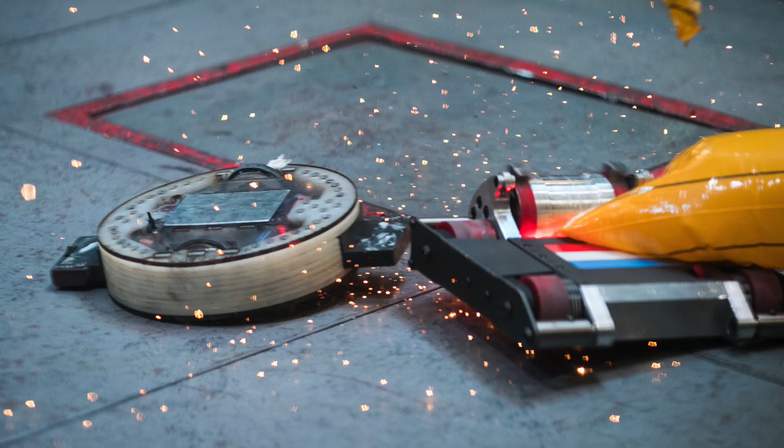Gareth, how would people in the robot scene know you? Mostly for my brushlessing, I'd like to think. But I mostly do beetles and feathers and some ants. I built Gear Down for What, which is the stupid brushless thing. Excellent, and that made you YouTube famous as well, I believe. I hope so, I believe so, yeah.

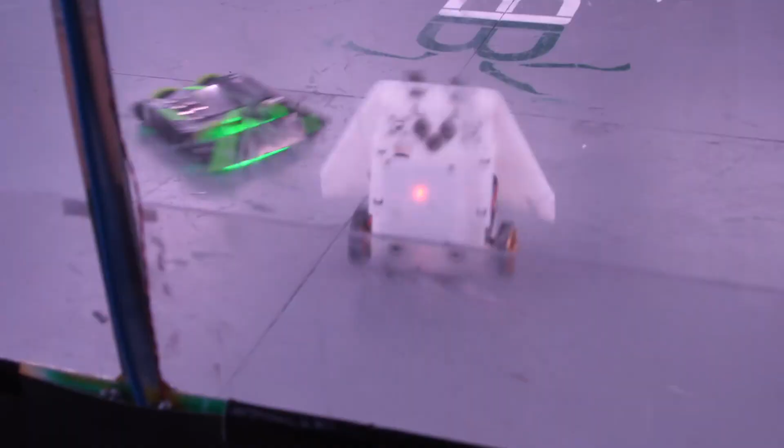And so famous with seagulls too. Yeah, seagulls, see, they know me. The birds are lining up outside my window right now, Joe. Wow, that's what's going on.

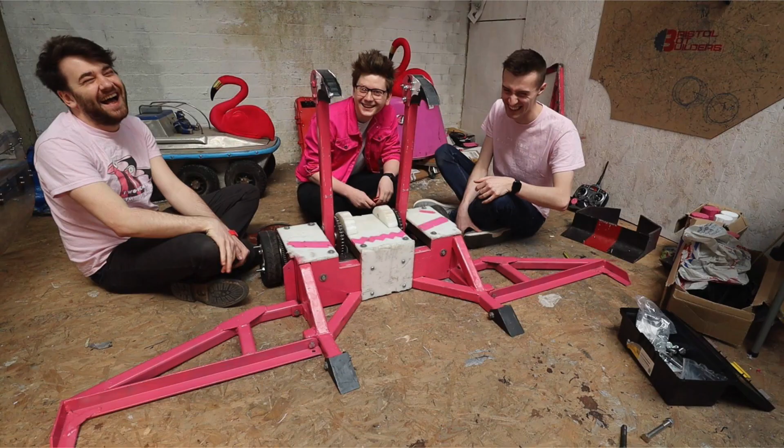Excellent, and together we are BBB, yes? Correct, Bristol Bot Builders. So normally we do events together, but we decided we wanted to do a featherweight together, and this is it. Can you see it on screen, guys? Yeah, what a glorious featherweight.

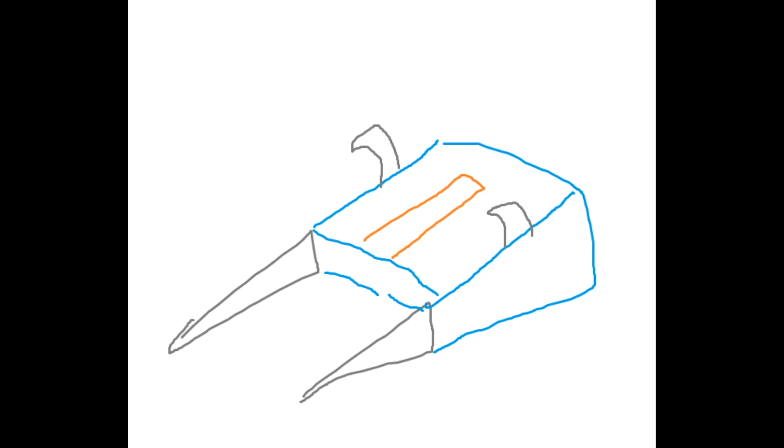So we had this idea back in August 2019, after the last Feather Champs. We did the Feather Champs and Robo Dojo, and we were like, Craig's not come to the feather thing, we've got to get Craig to the feather thing. How can we get Craig to the feather thing? And Gareth's magical brushless and Craig's great driving was a good combo.

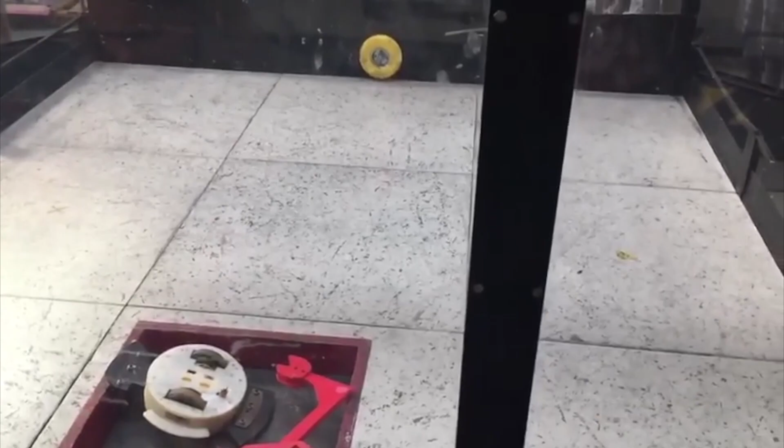So I'm just going to switch through some shit, some shit drawings, I think mostly mine actually. I think we said we wanted to do a feather cluster, and we wanted 3 of them. I think we wanted them to be red, green, and blue because Gareth really likes having gaming peripherals. Also it's near enough Powerpuff Girls, which I was - oh yeah, so it was Powerpuff Girls, it was RGB.

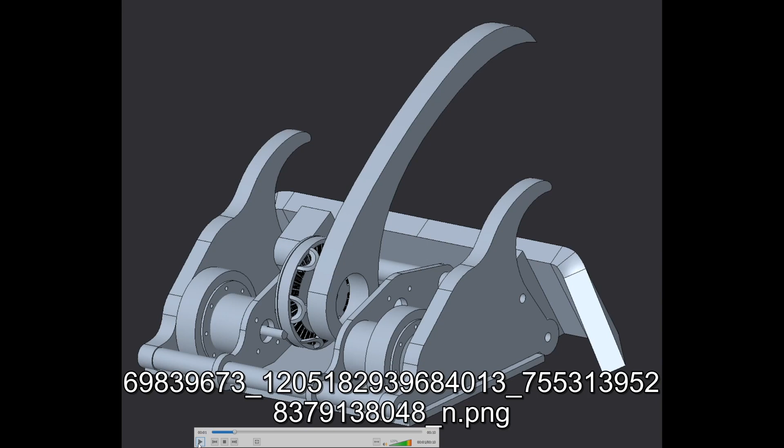Gareth was trying to put weapons on for me because I was begging for weapons, but there just really wasn't the weight. We tried waggle sticks, and Gareth tried this vert thing, but I think we settled on like a kind of wedge form, and it's using kind of Gareth's magic, which is massive brushless motors and direct drive, no gearing. All the brushless hub motors.

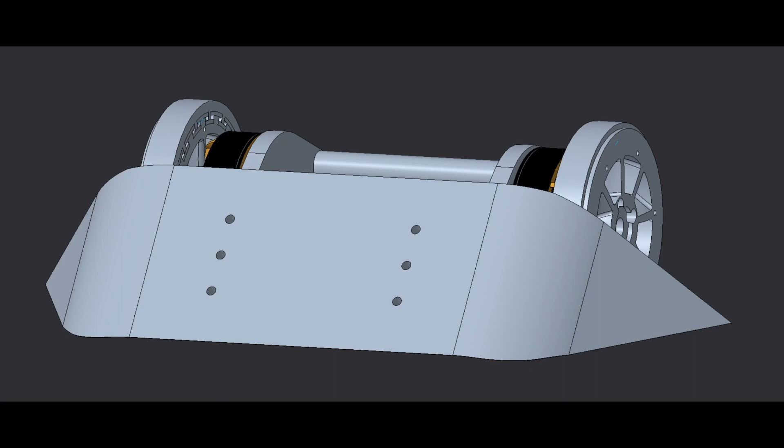And I think at this point we'd already looked at bending plastics. You can see that bent wedge that we've actually stuck with. After he'd made this version of it, he sent it over to me and Craig to ruin it in SketchUp. This is what we did with it, I think. I remember my one key improvement was moving the back axle, the big long bar at the back, up so that it could wheelie. So that's like this bit here on the left. There we go, nice wheelie thing.

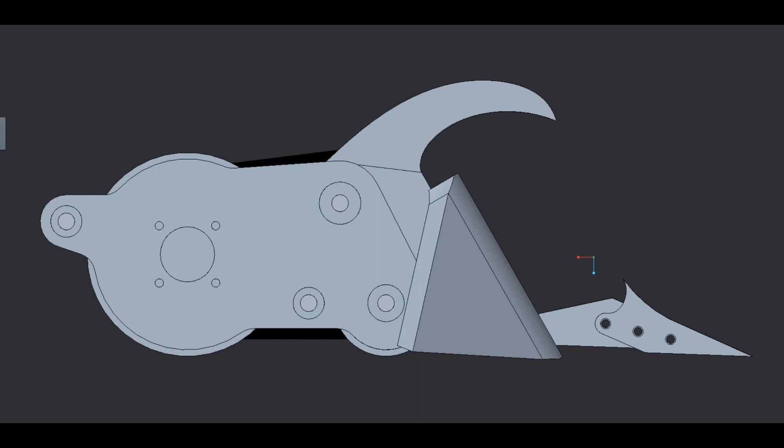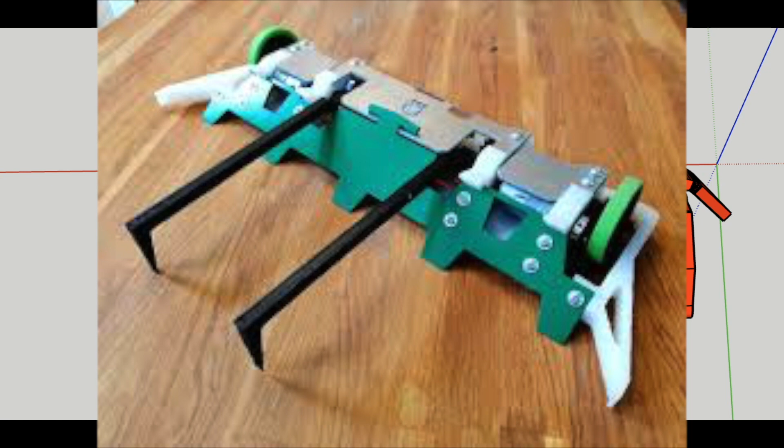Thank you. And we wanted to copy Alex Shakespeare, Shaky, as much as possible. So I just made it short and wider, so it was more like a wedge, his Antweight cluster. And he totally did give us his blessing, because we'd already ripped off his Beetleweight wide boy with flamingos, so we thought we'd just take it one further. Scale up his designs, I like to think. That's it, we take Shaky stuff and just make it bigger. Whether better is debatable, but bigger is for sure.

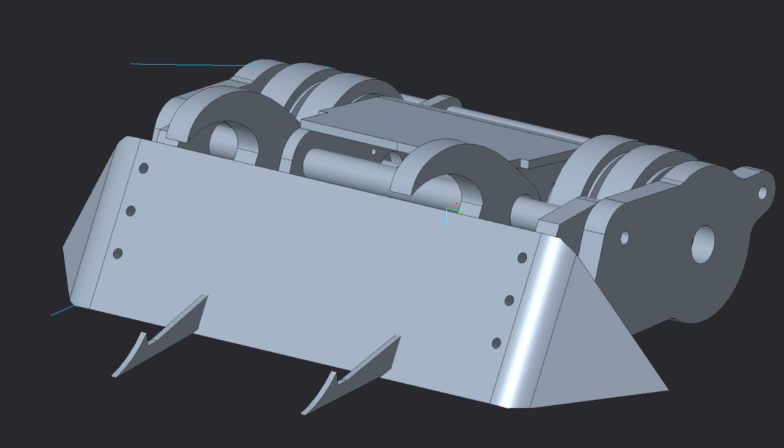So after we'd added the curved wedge, we added those hooks as well. We quite like the kind of stopping hooks. And we also wanted some forks, so we played around with some forks. Here is the RGB, the red, green and blue.

Beautiful. Priority number one, a big shared love of this group is HDPE, chopping board plastic. Absolutely, we like our bots to be plastic and just bounce around and take hits, ideally. Such a great material, make everything out of HDPE. There we go, make your life out of HDPE. Build a home out of HDPE.

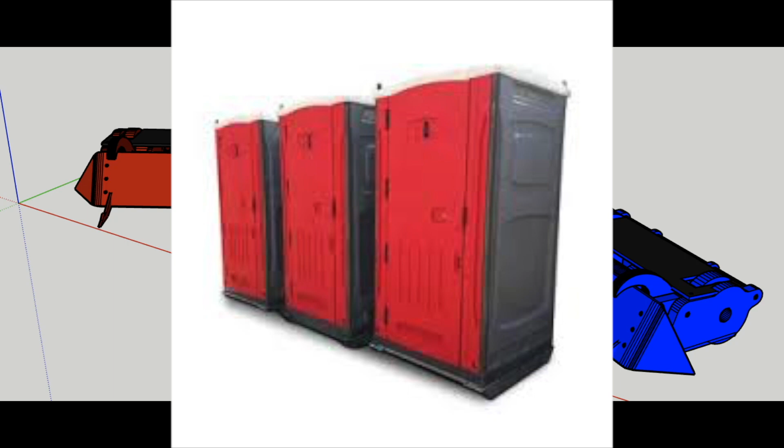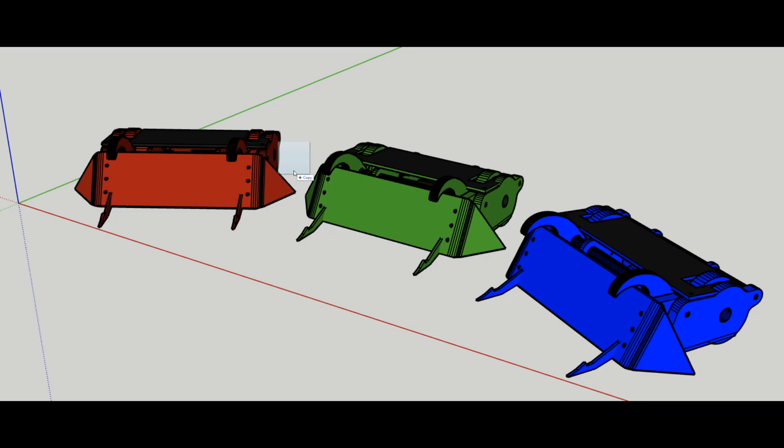I would. We literally just got the plastic in big sheets of this colour, and then we asked our friend Cosmin, can you please machine this? So I've compiled Cosmin's hours of machining for you guys now. I hope you're excited. So before we made the RGB bot, we decided we were going to make a prototype one out of white HDPE for Gareth to mess around with and do his magic with. So here is probably 10 hours of Cosmin's life in about a minute.

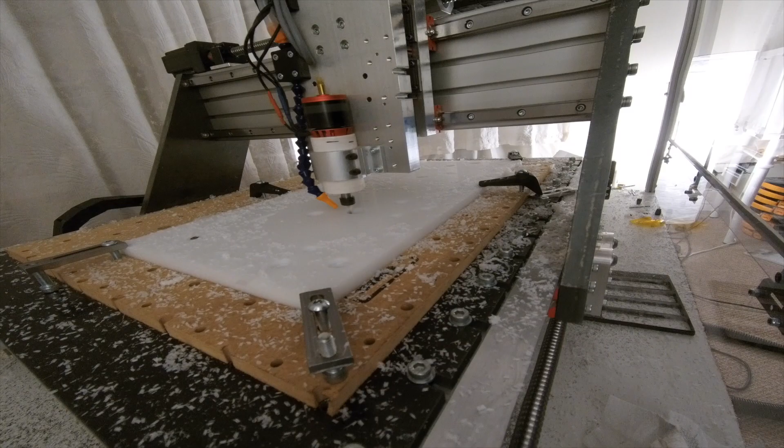That's beautiful. He's got this lovely CNC machine that I believe he's at least custom done a lot of, like the kind of brushless motor on the top. So obviously the brushless is something we're a fan of, or at least Gareth is.

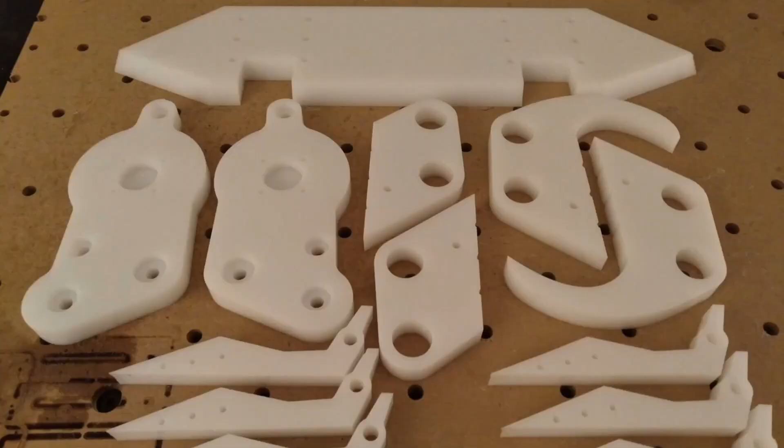You can see he's carving out all the parts of the robot, the bulkheads, the sides, the big wedge on the front's just coming out now. He's got his Hoover out now, giving it a good suck, and now he's just adding the little ridges to the wedge. That was the first physical part of this featherweight cluster.

So this was primarily for testing the fit, wasn't it? Testing fit, testing the electronics, and making sure it would all work before we spent lots of money on all the other ones. This was the test version of the parts, and it became known as the General. Later on he gained that name, and even Craig decorated him to look more general-like.

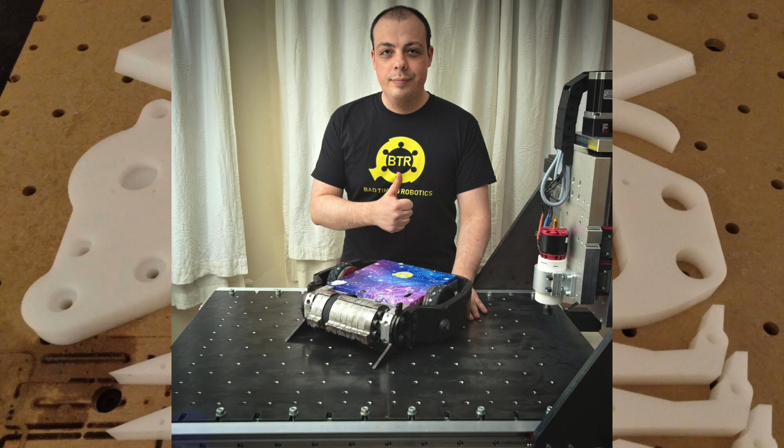I want to give a big shout out to Cosmin, or as we call him, Cozers, for his beautiful machining. Because this genuinely looked like it had been 3D printed or something - the machining marks just looked like little extrusions. It was really cool. Big up, Cozers. So smooth, so smooth.

I think this is around late December at this point. We ordered these motors from various sources in China. They came in completely different colour, size, weight and everything compared to advertised, which is excellent - various quality. Gareth opened them up and had a look. When I first saw them, I thought they were actually pretty decent motors. It was when you start looking closer, that's when you realise they're terrible.

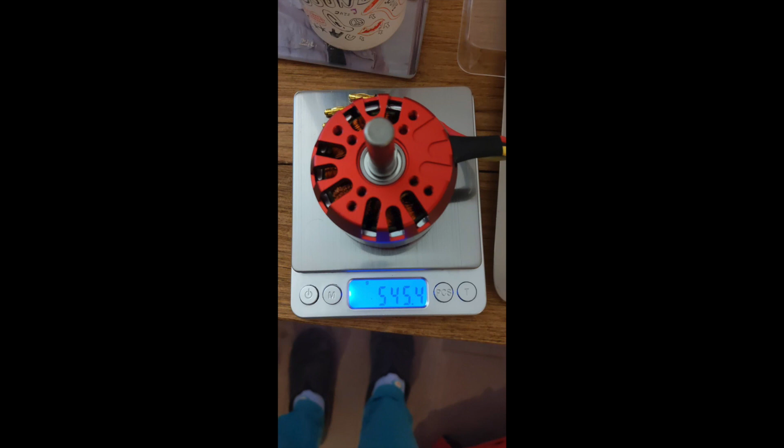They're really cheap power, to be fair, like 20 quid each, those ones. They'll put a lot of torque down, keeping the 1 horsepower per kilogram power to weight ratio going. Is that your rule for your robots? That is the rule. So here's another part of the magic that Gareth provides.

This is the magic that went horribly wrong - these ones where the speed controls are just overheated constantly, running an antweight weapon motor. So it can do that at least. It can do that, it's still overheated, but it can do it. Amazing, you can see them next to the ruler there.

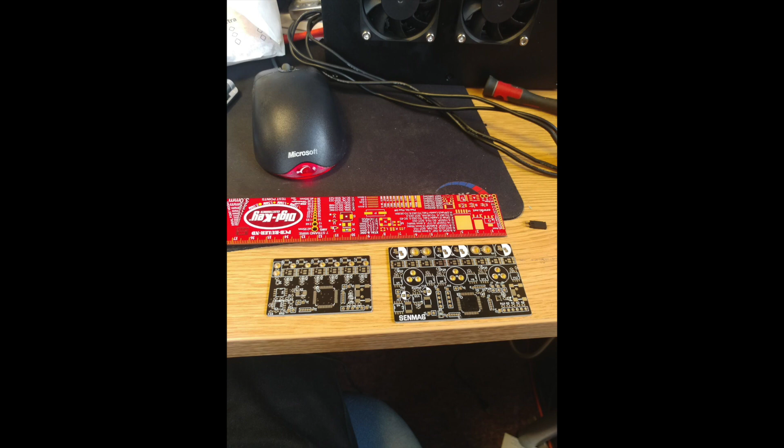They were ambitious. Oh yes, there's a ruler. Trust you to have a PCB ruler. Send you it for free. Yeah, they'd turn a motor, they just probably wouldn't survive well at sort of 40, 50 amps.

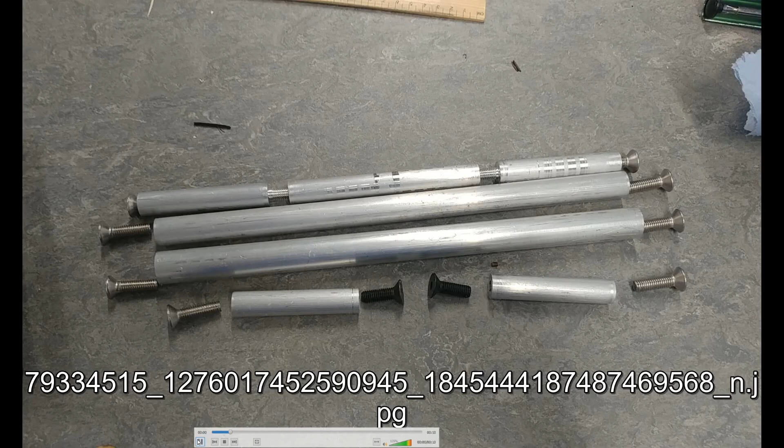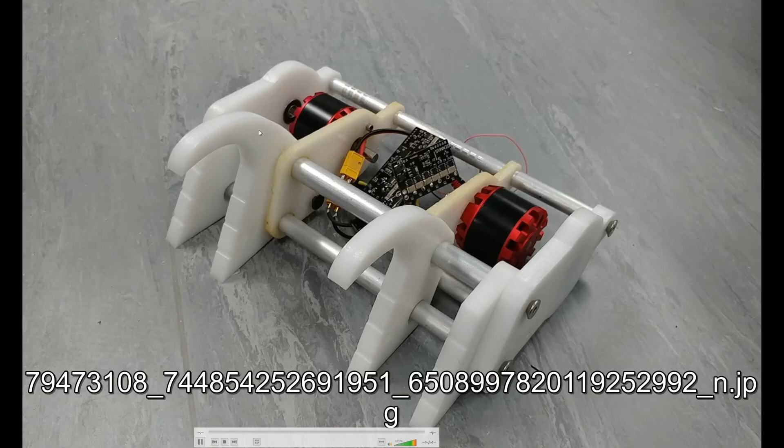The Gareth build style is this sort of HDPE or nylon, some sort of plastic along the sides, and then across it is always some aluminium bars. So Gareth had machined some for testing like a mad lad, and put together this sort of chassis here.

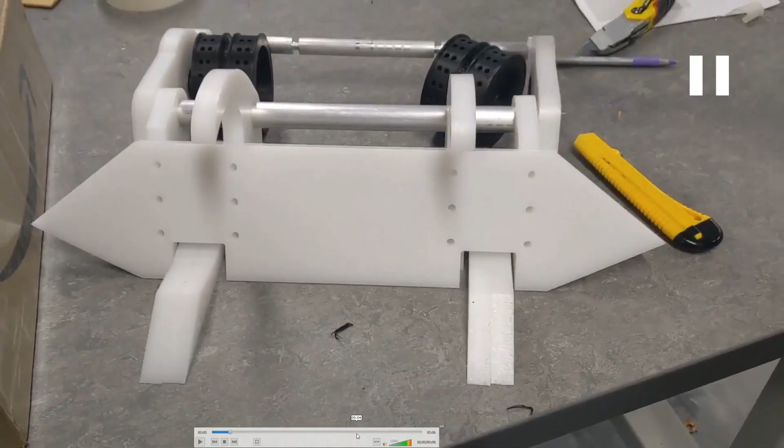After you've mostly assembled that, I think you managed to get that guy driving. So let's have a look at some little clips of this boy driving around. Jesus Christ. I feel like one of these would be a threat to a featherweight. I think this is the exciting thing, as long as they're not glass cannons, you know?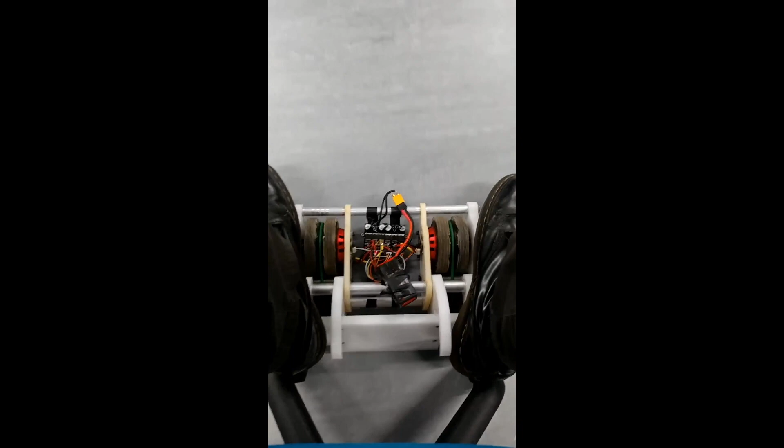Here's one pushing Gareth around, thanks to the vertical video, Gareth. I appreciate that. You're welcome. Sarcasm. So yeah, at this point Gareth had proven the concept, right?

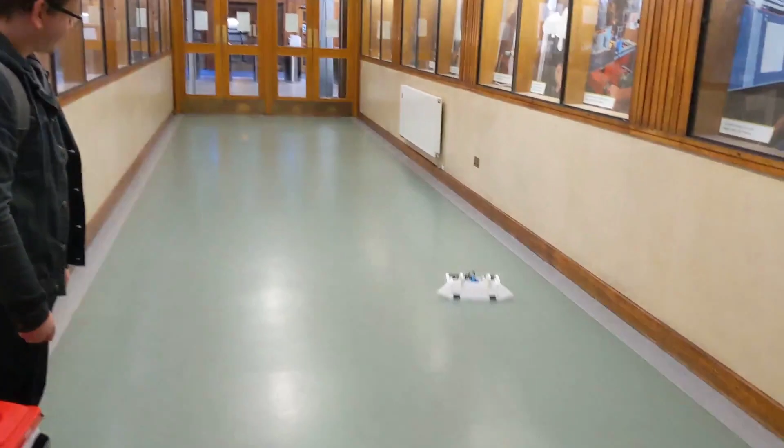It drives. Which is all we needed, right? Yeah. Cosmin sent us this lovely package.

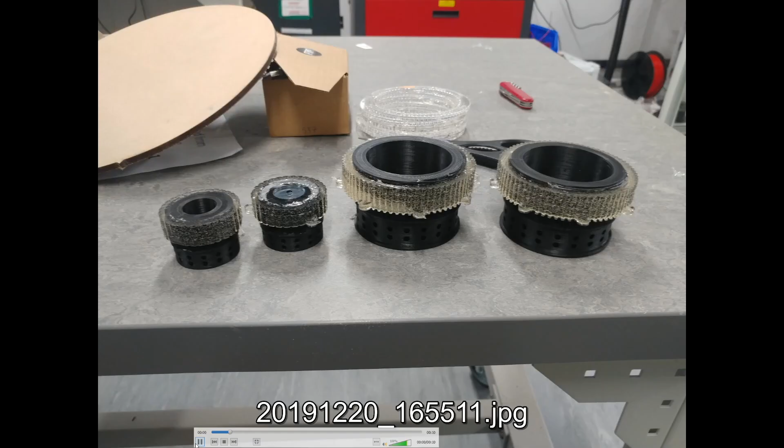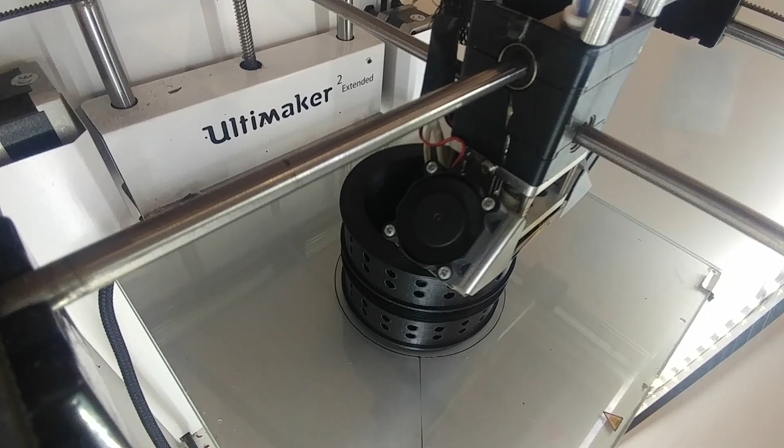So now we're on to Gareth's wheels. This is like almost scaling up ant wheels. There's not many people that do 3D printed wheels at featherweight. This is another thing into the glass cannon side of it all. I mean, it works at Beetleweight.

You 3D printed hubs that click over the top of the motors, laser cut these acrylic molds. I love acrylic. You're doing this one-handed. Yeah, this is great. That's the problem with being a YouTuber, Gareth. You know the struggle now, man.

And you're moulding the tyres onto those. Yeah, so you 3D printed hubs, it's a polyurethane mix, so you just mix two parts together, pour it into the mould, and it sets directly around the wheel hub.

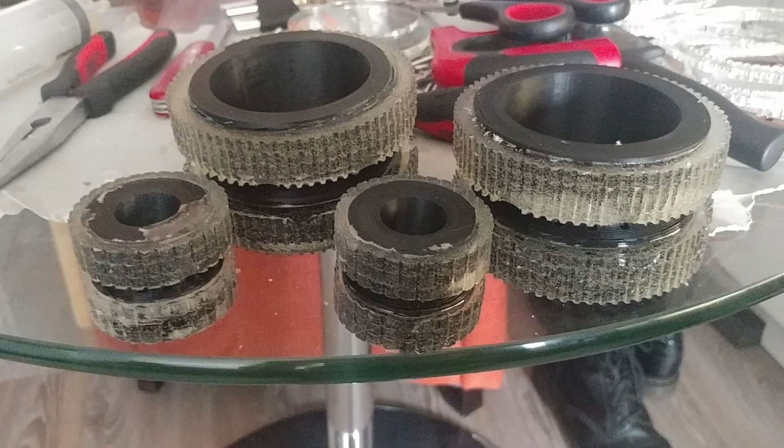This is where Gareth made the alley bars. I made a couple, but Gareth made 90% of them for the robot. They just sort of measured to different sizes. And yeah, before everyone thinks we have loads of fancy tools, we don't.

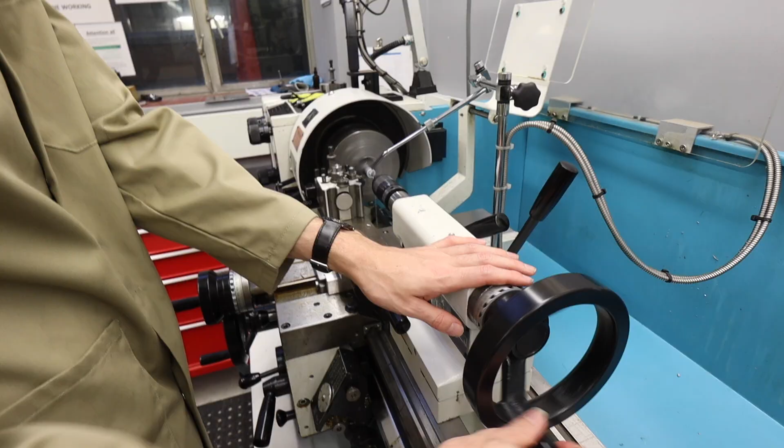We just leech off the university, alright? Yeah, big shout out to Mike at the workshop, Mike at Bristol University Student Workshop. He just makes stuff for us that has nothing to do with university. So, shh, I didn't say that. Give that man a raise.

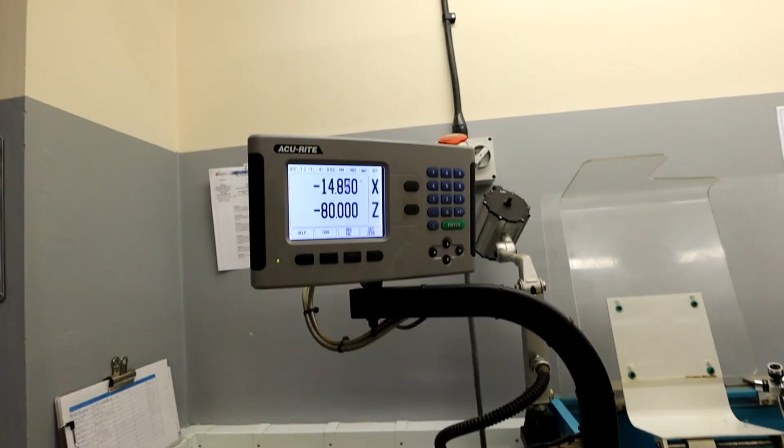So at this point, we were discussing the theming, because I told Cosmin we were doing RGB, and he was like, oh, that's quite good, but it's not that silly for you guys. You normally do really stupid robots. And so there's 3 of them, so we talked around the 3 Musketeers theme.

So this is some concept art, I guess. And then this is where Craig's absolute creme de la creme comes in. This is Craig's... Craig de la creme. Craig de la Craig.

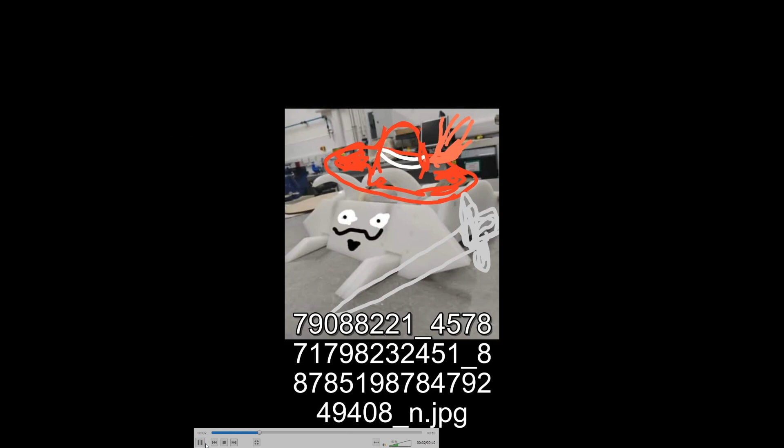So yeah, we obviously tested this out with the concept of hats. We were like, okay, this needs to be a Musketeer style robot. So here's some concept art again, high quality stuff. And then here was a hat I've ordered off eBay with a banana for scale. So here's testing on the robot, some lovely Photoshop from Craig there.

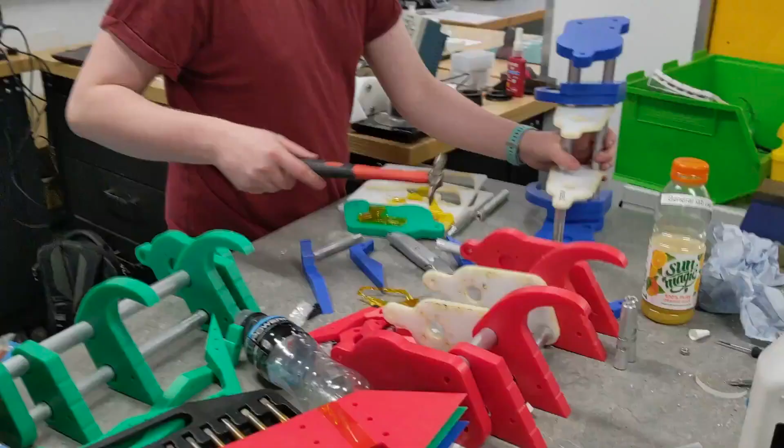So we knew at this point this had potential. It looks ridiculous enough to be something that we have made. Now it felt like not just an amazing Gareth robot, but a Gareth robot that's been tainted with our shite. So now we actually start building some robots because we're happy with the prototype.

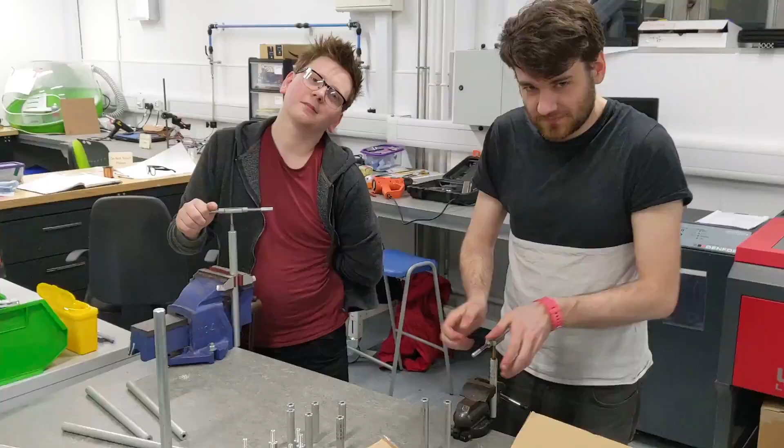So let's see, the session begins with tapping. So the boys are tapping some holes.

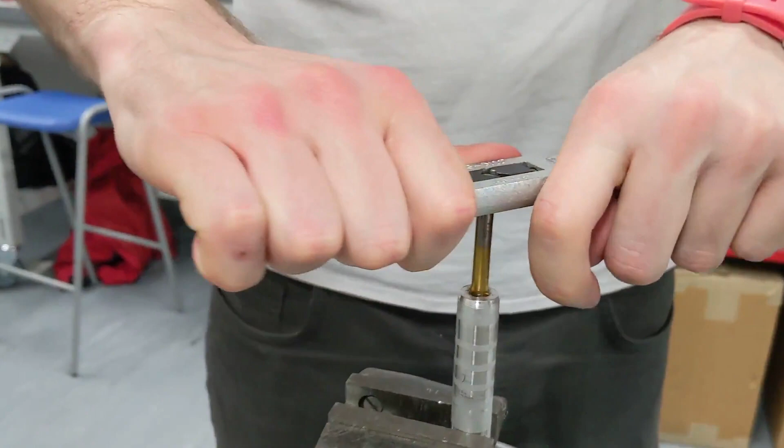Should be banned from robot combat. I'm saying it, these would be better if they were HDPE. Let's get a close up. Have you ever considered making your motors out of HDPE? Oh, he's pretty much home there, almost hitting in. I'm almost in, my first tap of the evening.

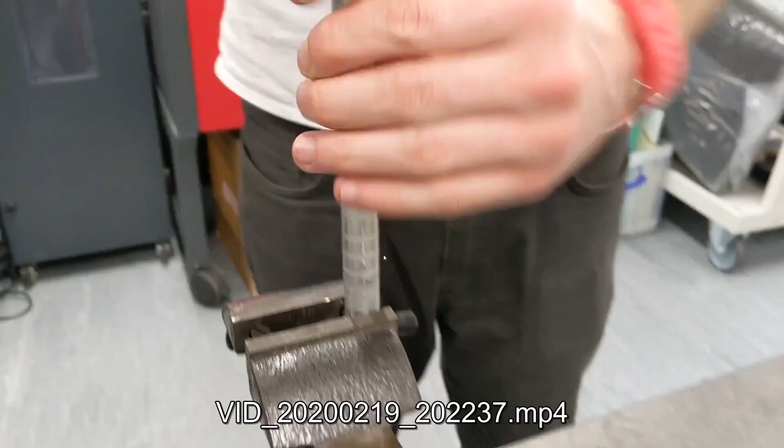It's only taken me 20 minutes. And Craig's already got through a whole two ends of tube and 3 ends now. Look at all that. How are you saying? We spent bloody ages just tapping, didn't we? It was a long period of tapping. It was more than an evening, wasn't it?

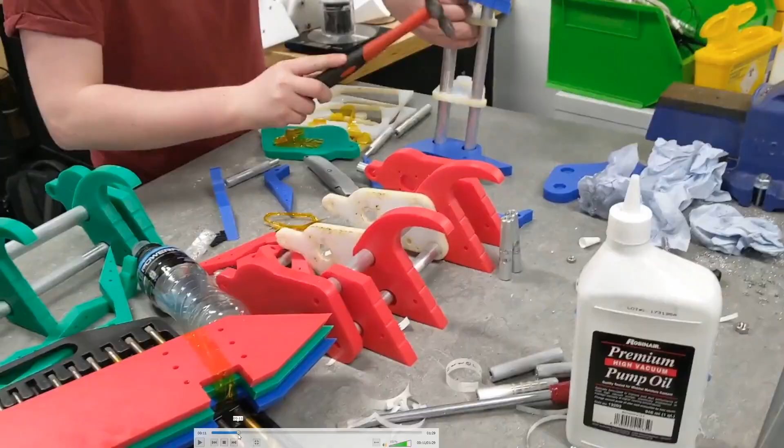So you guys carried on the next day. The bars sort of go between the different bits of plastic and kind of screw together to hold it in place, and are probably going to shred instantly in combat, which is really good.

Sorry, I think as time has gone on, my faith has lowered. But also, we had fun with the label maker. That's for sure. No, nobody had fun with the label maker. Absolutely nobody.

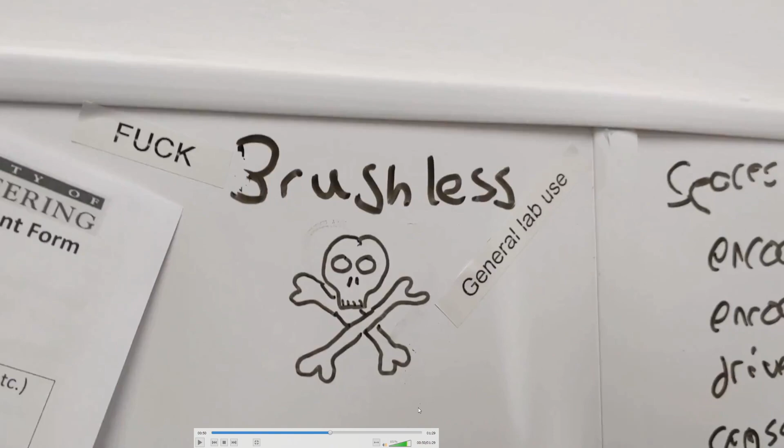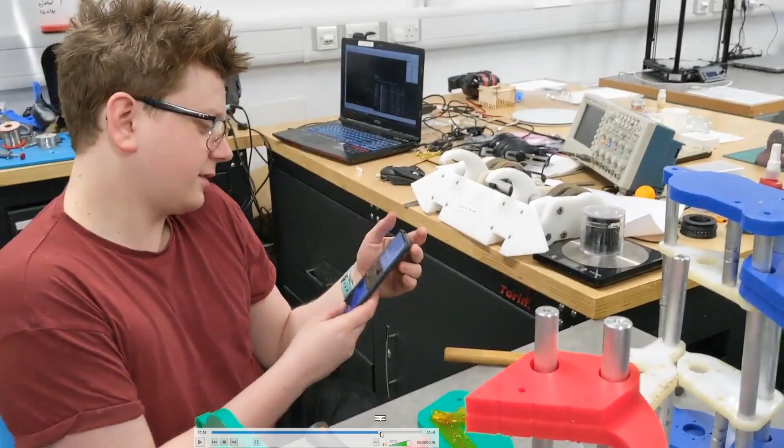And that's how the General came to be. There was a general lab usage label, and the 'lab' bit came off. You can see it there. So at that point it just says 'general' - his full name. And that's the General's origin story, which is magical, isn't it?

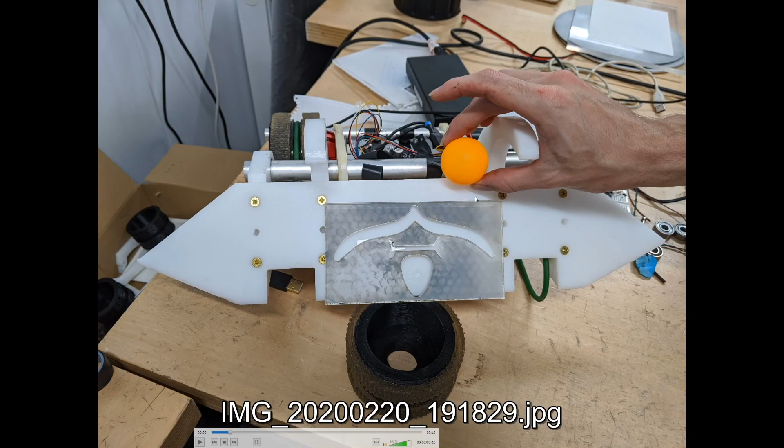So this is where you're testing out the moustache from Craig's lovely drawing. Having a look at this is Gareth modelling a ping pong ball as an eyeball test. So then we were doing the pods that kept the battery and the speed controllers in.

We use these thingies, shout out to Fingertech. This is Craig working his magic - this is Craig's absolute area of expertise, is heat bending 5mm HDPE. 5mm HDPE is my favourite material. You can do so many wondrous things with it. Unfortunately, this robot is not one of them.

So yeah, we had a go. They didn't really line up, but here's Craig having heat bent one of the pods. You can see how they kind of curve around, and yeah, they look kind of cool at this point, but I messed up all the holes - none of them lined up. The heat bending, as you can see, is already starting to shift out.

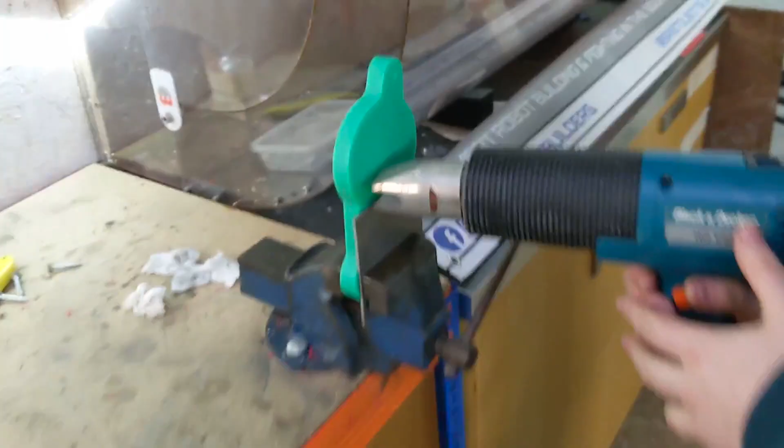Craig's also at this point testing out bending 15mm HDPE. I'd never bent anything this thick before. So that was like an offcut, wasn't it? That was one that was messed up or something. Yeah, Cosmin had put a slight crack in it and it would not accept it as good.

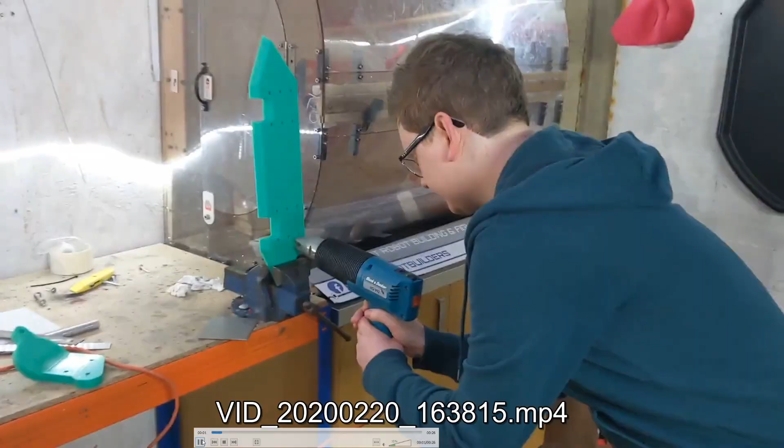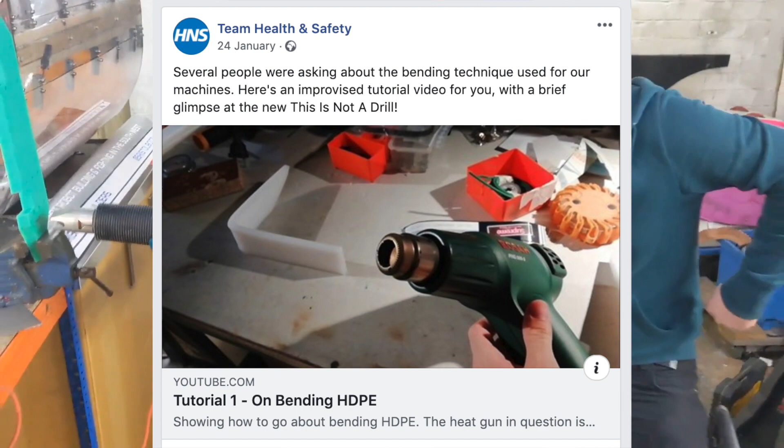So then Craig actually bent the actual wedges themselves at this point, which we're curving around the sides to protect the wheels, weren't we really? I guess. Definitely shout out to Greg Catalina for his tips on bending HDPE - check out that link in the description.

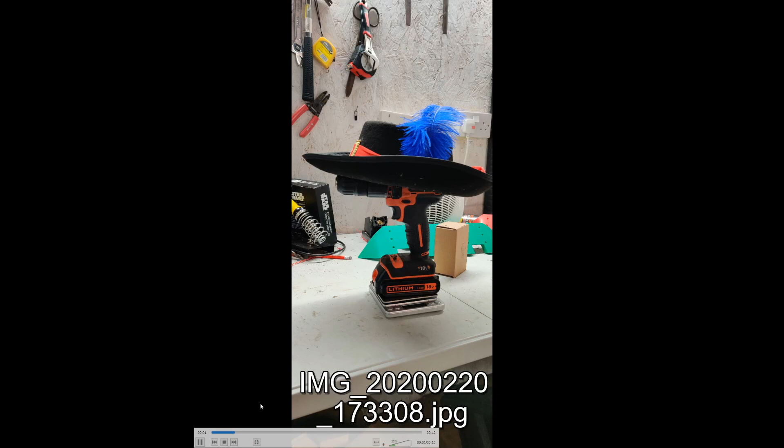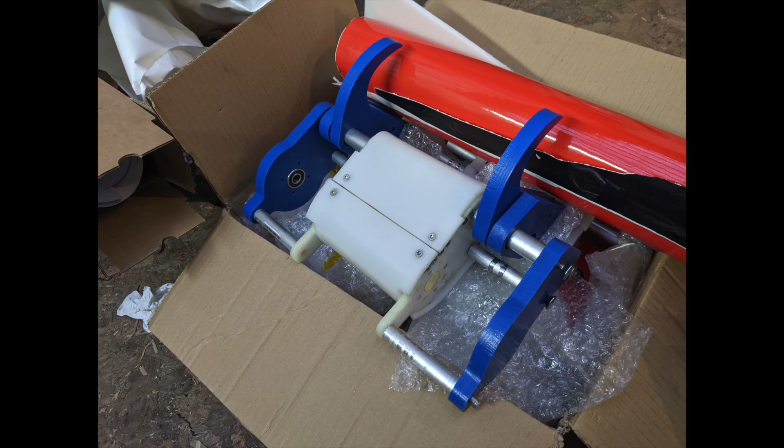That was our main building session those 2 days, I guess. So not much building - that's thanks to the Gareth style of robot, which is get the machines to do 95% of the work. Gareth has now soldered and wired up the electronics for all 3 robots.

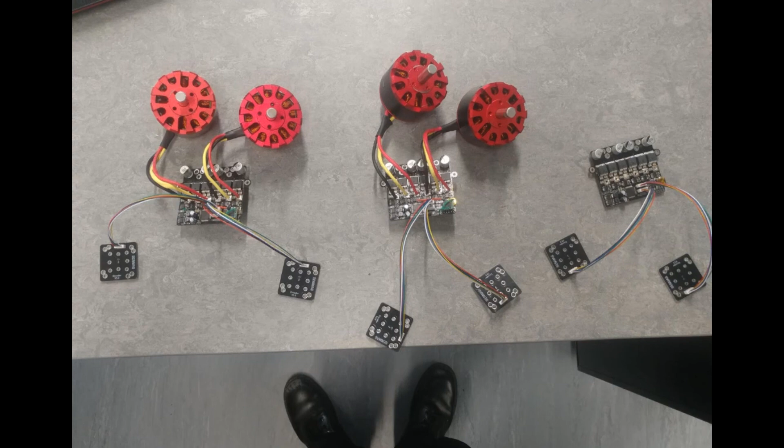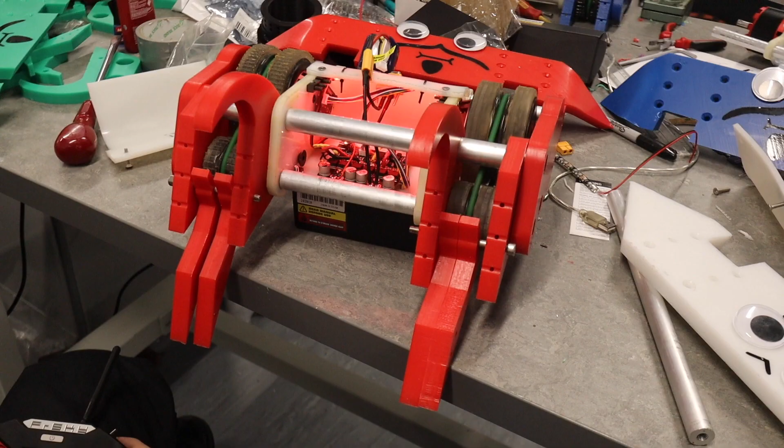So those were the actual working ESCs, didn't overheat. Each ESC is sort of 2 channels, so it's got one circuit board for 2 motors on it, and on the circuit board you can see there's 2 little circuit boards hanging off - those are encoders. It's kind of like a trick for brushless control; if you want to do it well, you need to use an encoder. The main thing is these encoders are then attached around the back of these motors with magnets detecting when they're rotating, so that the speed controller knows where the motor is and how to drive it well at slow speeds. You sort of tell it where to put the power to make the motor go in the direction.

The other thing is there's some cheeky hacks in there - there's the receiver, the little green square thing there, just a mini receiver soldered on. But you've also got a gyro, haven't you, in there? Gyroscope's very underrated - it's the same thing that keeps little quadcopters steady, but for turning. When you tell it to turn at a speed, it'll turn at that speed no matter what's going on. So if you tell it not to turn, it'll not turn - you just go straight forward, the robot will go straight forward.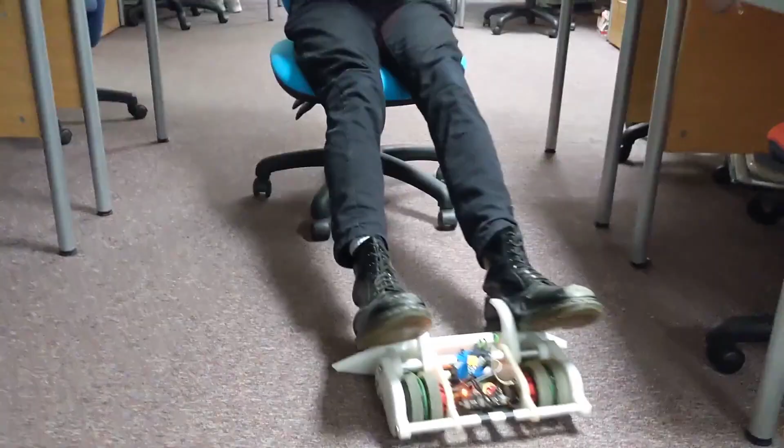It's weirdly hard to make your robot drive in a straight line, particularly if it's built with hand tools, like most of ours are. We've not attached these yet, this is a future thing to go in. These are, if we've got the weight, 3mm Hardox forks.

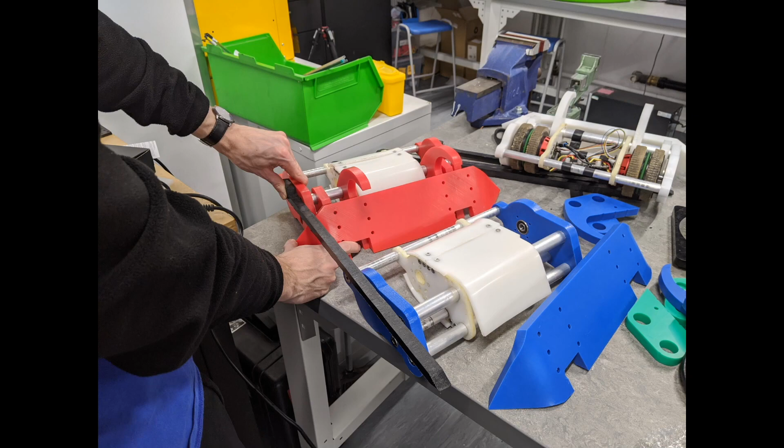They're going to sit between 2 pieces of HDPE, and hopefully help us wedge some things. We've got these HDPE swords made out of spare bits of Excalibur, the one that went over to China. Shout out to our good pal Craig Collius, we love you very much.

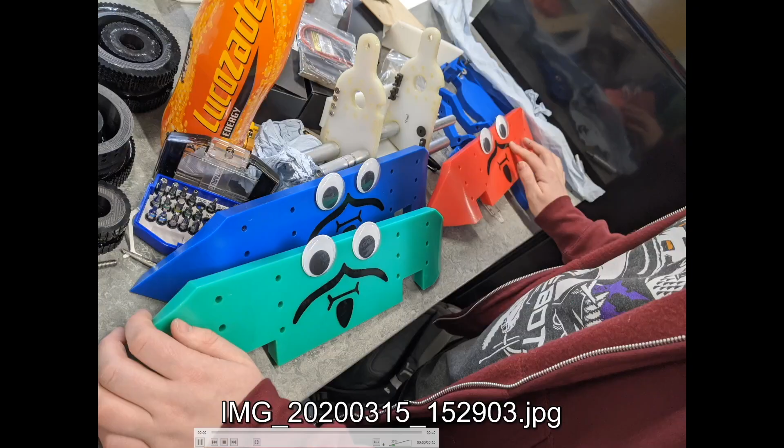And here's the test with the googly eyes. As soon as the googly eyes came on, as always when you add googly eyes, things come to life. So adorably derpy. Craig hand carved these out of vinyl. Vinyl was always going to be the only way.

And here's the general in his final form. Craig, absolutely beautiful art here, friend, well done, big shout out. Thank you, I'm an artist.

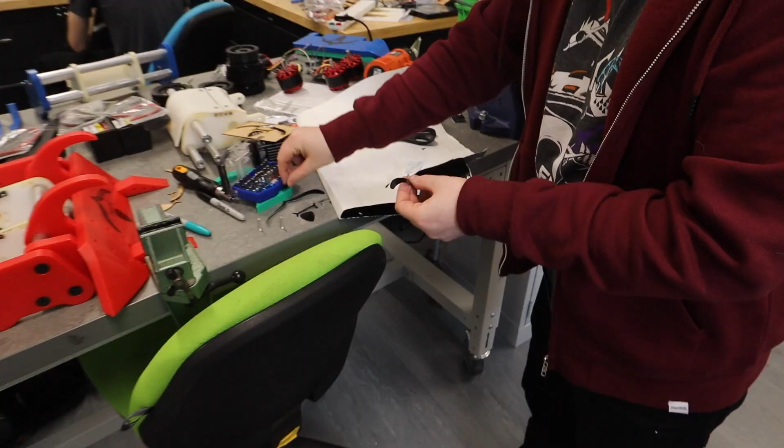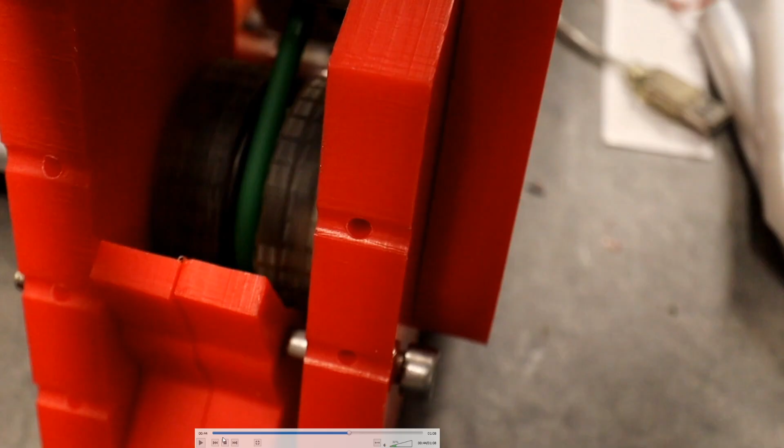These robots are actually 4-wheel drive. Lower of these 2 aluminium bars also acts as an axle for the front 2 wheels, and they're just belt driven with this green belt here. Another one of the Beetleweight features has been scaled up. This is the second version of Get Out before I went up to 4-wheel drive, and it drives so much nicer. It's the way to go, particularly if you're doing pushing robots, which is all these things do.

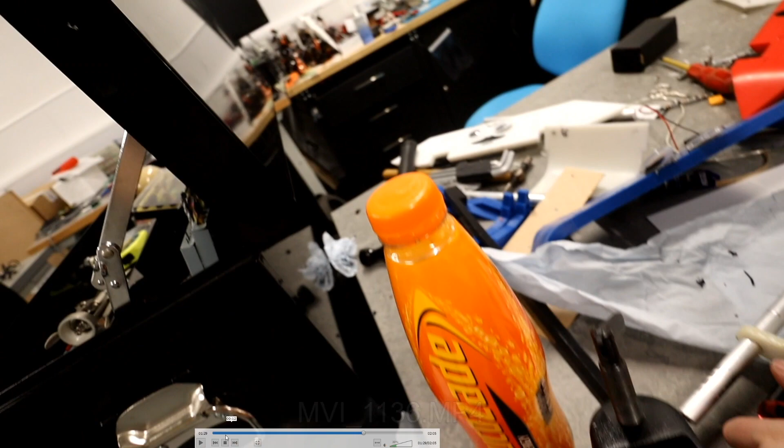So we're testing out the lovely camera work there. Thank you, that's what I contribute to the team. And you can see actually it's doing a little bit of a buck.

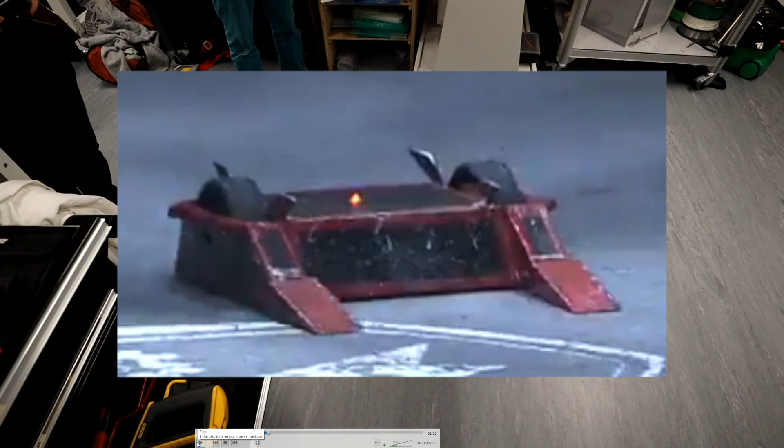At this point I want to shout out Dave Weston, because we stole a lot of the design stuff from his featherweight Satanics actually - his sort of wedge style, the angling up, and the hooks on the tops. Satanics also has a gyro.

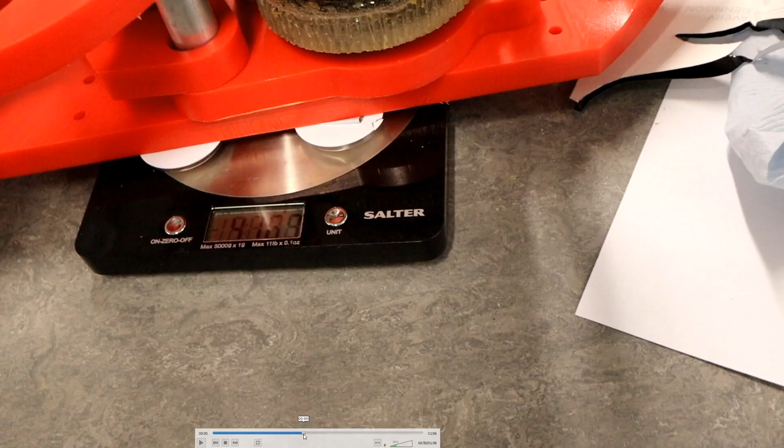Craig saying 'I want to die' for the 20th time that day, probably. If anyone's still saying 'oh hi, I didn't see you there,' that's not Craig's catchphrase anymore - it's 'I want to die.'

So weighing in with all the bolts and the battery, we're looking at 4.4 kilograms at this point.

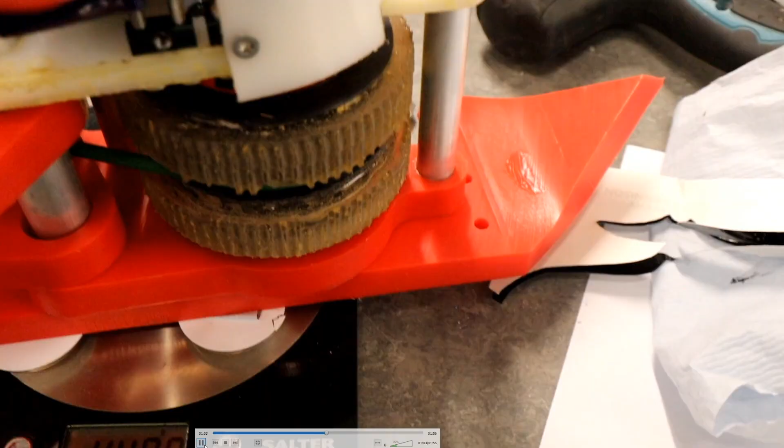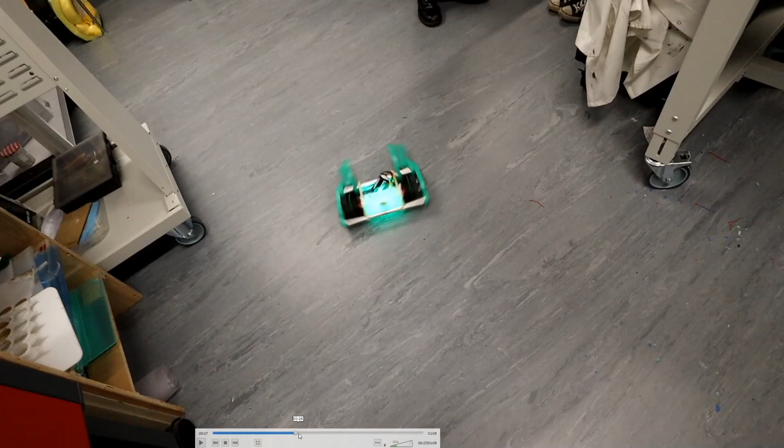It's also worth pointing out we colour coordinated the LEDs inside. Craig, we've kind of coordinated which ones we have, right? That's right - you've got red because Crab, I've got green because Snappy was green, and Gareth is blue because... that was the one that was left.

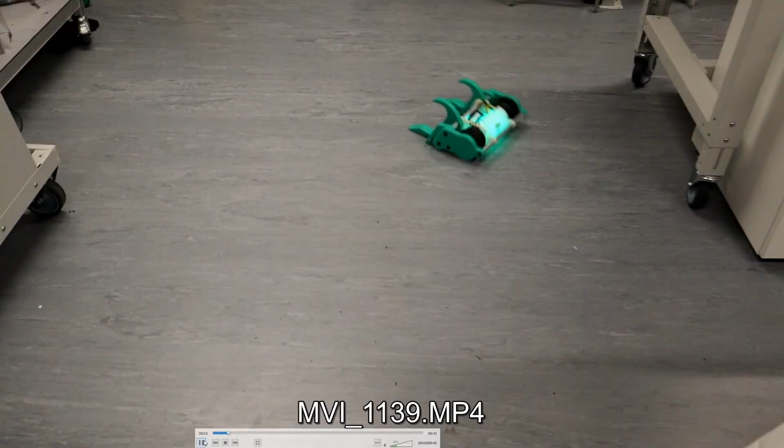These are the bots testing out the drive. You can see how nicely they drive actually. Look at that wheeling as well, that's so cool.

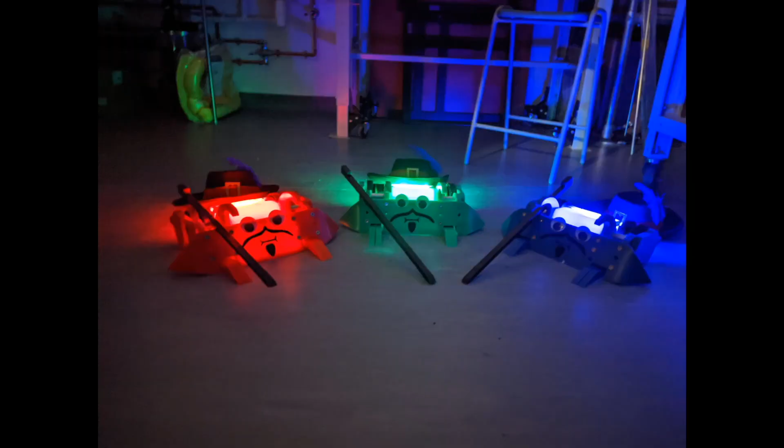Finished up by attaching the wedges, putting them in a stack, did a little photo shoot with them. So we've not attached the swords or the hats in any way yet. That's where we got to, and this was back in the middle of March.

We were kind of rushing them to finish for Robo Dojo, which then inevitably got cancelled.

We can't wait to fight them, right? It's gonna be sick, it's gonna be ridiculous, it's gonna be something. What speed do you reckon, Gareth? Can't remember, it's gonna be quick - like 40 or 50 or something, theoretically. I just can't wait to get out and fight these, it's gonna be a real experience. It's gonna take some coordination, isn't it? It's gonna be very strange having to work together like this. Oh, it's gonna be a mess, and Captain Jack's gonna break them all very quick.

Anyone else we really want to take down? Like anything that spins, really. Should we call out Sam Price here? I think that's a reasonable person to call out, that's the trendy thing to do. I think a lot of people fear Sam's robot - me and Gareth spent the whole of the Feather Champs wanting to fight him for some reason.

Let's bloody close out then, shall we boys? Yes, how do we do it? Should we do a big chant together? What are we going to chant, Craig? I don't know. Craig de la Craig.